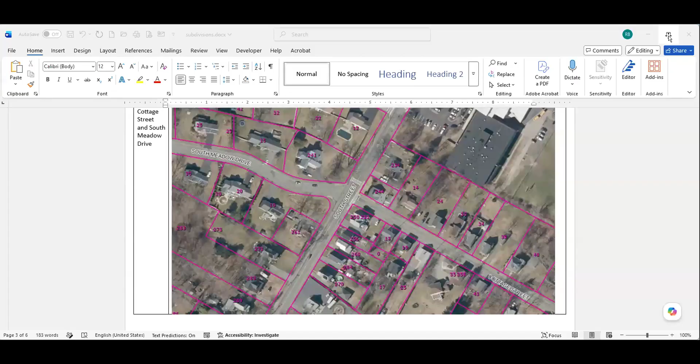Okay, so if you're at South Drive and you look across, there's your road. So my position is that this is an intersection, and the roadway is across from the current roadway that's there at South Drive. I don't see any issue with that alignment whatsoever. And I think that this is the best illustration that shows you what it really looks like. I can show you other examples in the town that you frequent, I'm sure, and you don't even give it a thought. One that comes to mind is where Birch Street meets Village Gate Drive. Yeah, so you see Birch Street, Village Gate Drive. That's more offset than this is, and people just travel across from one to the other.

What's the next one that we were looking at there? This one here was Cottage Street. You come up Cottage Street, South Meadow Drive was done, I don't know how many years ago, maybe 15, 20 years ago. But its alignment with Cottage Street is not 100%. It's pretty close, but it's similar to what we're talking about. And those two have obviously more traffic to handle there between South Drive and Cottage itself, never mind bringing in South Meadow.

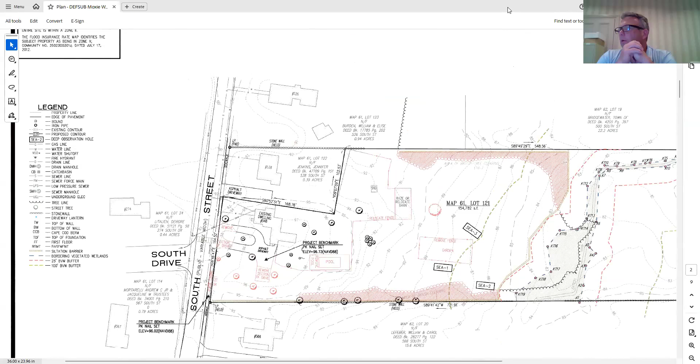Okay, thank you. Larry, I have a couple. Rebecca, can you bring up the most updated plan set? I just want to go through and get clarification on a couple of things. Of course. Is there a certain page you'd like to see? If you can start with page 1. Okay. You got it? No, the front page. The cover page first. Got it. Okay. Well, one of the pages you had the nitrogen loading calcs on. Where is that page? I thought it was page 1. It's actually page 3. Okay, can you blow that up?

So we've gotten a number of letters, most recently the one June 17th regarding the zone 2 and the water quality and everything else in that area, which I'm concerned about as well, right? So after getting those letters and just before the last meeting, I pulled up the Title V regs just to try to better understand it. From what I understand looking at the DEP regs, what they refer to was a nitrogen aggregation subdivision plan, right? So it says DEP recommends a nitrogen aggregation subdivision plan be submitted.

And I asked this question before about restrictions on each lot. So you're showing that there can be 12 bedrooms total on the lots, but one of the lots, lot 4, already has sewer. Is that correct? Yep. So the remaining 3 lots will have the 12 bedrooms, correct? Yes, and they will use some of the excess of the land that's there. Lot 4 can still contribute to it not being a nitrogen loading issue. So all 4 lots will have a nitrogen loading restriction on them, correct? Yes.

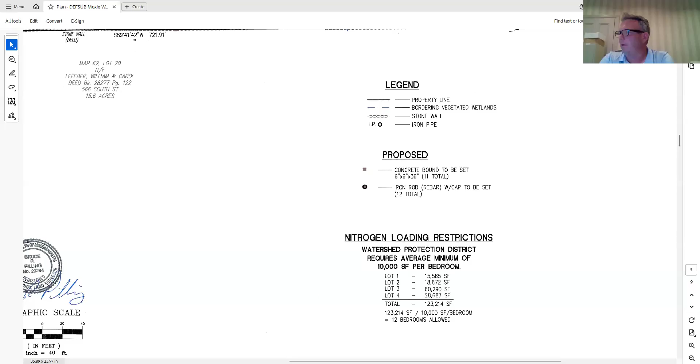I don't understand. The nitrogen loading issue is not related to your water withdrawal. It has to do with its proximity to the aquifer, the town's aquifer. So I don't understand what the well on the site has to do. Well, so all 4 of these lots, you're gonna do a nitrogen loading plan or an alternative design for all 4 of these lots, correct? Right. And you're pretty sure that lot 3 will not have to be modified to have the credit land housed on that lot?

That it would have to have what? So where would the credit land be? The community itself is going to aggregate together in that aggregation plan. Yeah. And some of the restrictions are simply don't fertilize, or the pavement doesn't count, which is why the road isn't counted into the calculation. But the whole aggregate, the whole sum of all 4 lots, will work in conjunction with each other.

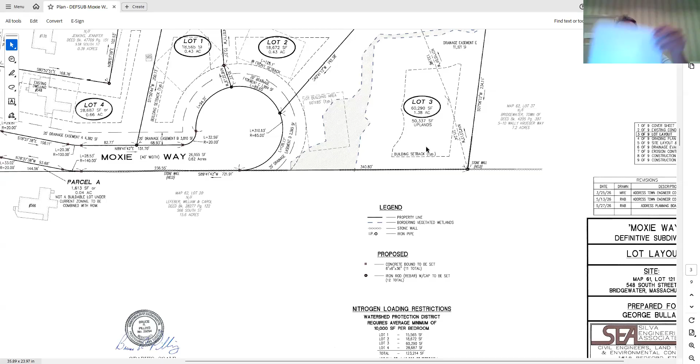So whatever restrictions. And just because I want to make sure that if we go forward with this tonight, we get the condition right. So there needs to be a nitrogen loading plan for the entire site, correct? Yes. And I guess the confusing part to me was I always thought, and I guess I'm wrong, that each lot had to have the 10,000 square feet, or you needed credit land somewhere else. And one of the examples they give talks about a developer wanting to build.

It says, an example: developer has 42 acres in a zone 2. The usual subdivision in this town could support 36 1-acre lots with 4-bedroom homes. However, there are 6 acres of roads. To meet the 440 gallon per day rule, the developer proposes to aggregate with the cluster subdivision allowed under local zoning and do half-acre lots. So basically, the applicant proposes 36 homes, each on a half-acre, on a total of 18 acres. To meet the 440 per acre equivalency, the applicant must set aside land area of 18 acres.

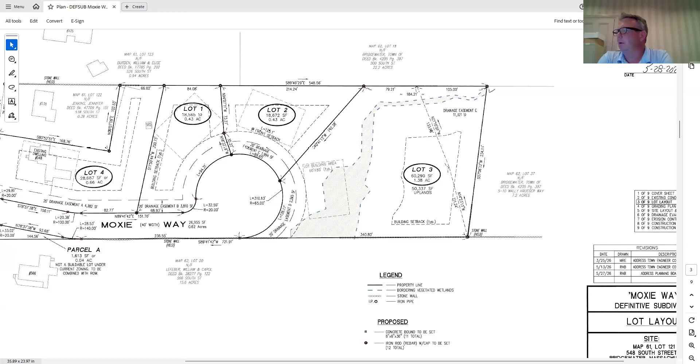So there's no land being set aside, is that correct? Well, what is being set aside, it's being restricted. When they say set aside, they mean that it's having a restriction on it. Yeah, a conservation nitrogen loading restriction, right? Yeah, and that's what we're doing. And that can just be part of lots 1, 2, and 3. Yeah, it's going to be part of 4 because 4 has excess land that can contribute. But Rebecca was saying we don't need the land from 4 to do it? No, we need all 4. I'm sorry, we do need all 4.

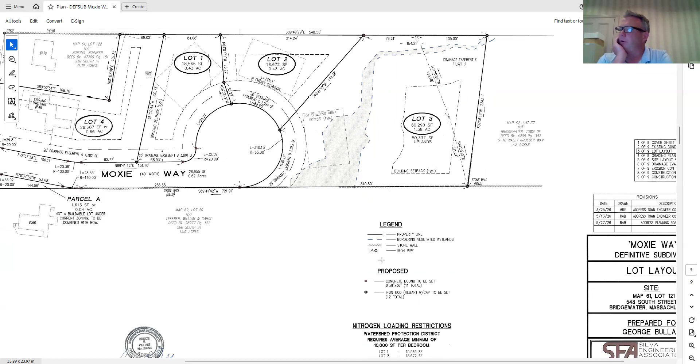So we need the land from 4, because 4 doesn't take away, because it's connected to sewer, but it has land that can place a restriction on it that helps the other 3 lots. Okay. So the total number of bedrooms on lots 1, 2, and 3 cannot exceed 12. Not unless further denitrification was proposed, which would cause more Board of Health approval process. And I learned something. In the future, when we have stuff coming in zone 2, whoever the planner is, we should be requesting that a nitrogen aggregation plan be submitted prior to coming to us.

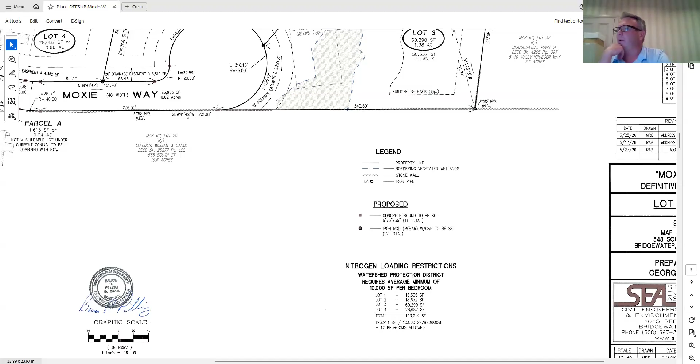But, all right. So next, while you're on the screen, can you go up a little bit, Rebecca? Because I have a drainage question. So Larry, you said, and Greg, do you agree with Larry's assessment that the drainage basin and drainage easement E is not part of the subdivision drainage calcs?

Greg? Greg, you're muted.

Sorry about that. So I reviewed the drainage calculations, and in order to meet the pre and post BMP standard 2 runoff condition, the basin on lot 3 needs to be built. Otherwise, the 2 and the 100-year storms aren't mitigated. The basin on lot 3 is part of the subdivision's hydraulic analysis. So I have to say that basin on lot 3 is needed in order to meet the pre and post development mitigation standards, which is BMP standard 2.

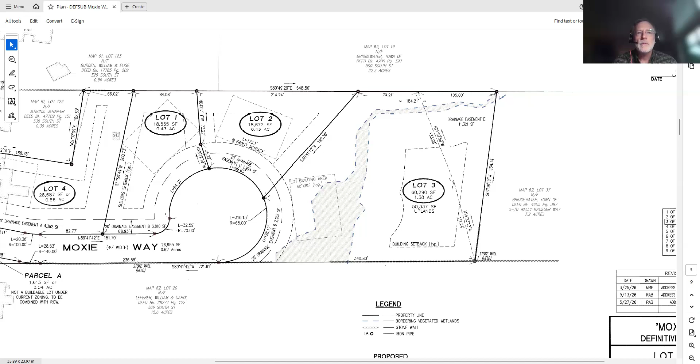Well, a cursory review based on this design and this house, and what I can remember from the drainage is what little bits aren't going into the drainage basin already, I don't think would trip the pre to post. But unfortunately, like Greg said, unless I run that scenario where we remove the driveway and tie everything up with the grades, I really don't have 100% on that. We might have a little bit of a swale that we could introduce on this lot to offset it. It wouldn't be a huge event that we would have to create another large basin.

It would be a small little depression we may have to do on one of the lots just to offset the little bit that we may encounter. Again, unless we're looking at that scenario directly, it's tough. I can only assume we would be just under those numbers or at those numbers. But just so I understand, it is part of the subdivision drainage and it would have to be maintained by the HOA, correct? I don't believe that was the case.

Well, the reason I ask is there's an easement that we asked for, Mr. Tanzi asked for. But I'm trying to better understand how the easement does anything because there's no access. The easement, we need access to, right? You need an easement over the driveway. I mean, how is that basin going to be maintained with no easement access? Homeowner of lot 3 would be required to maintain it?

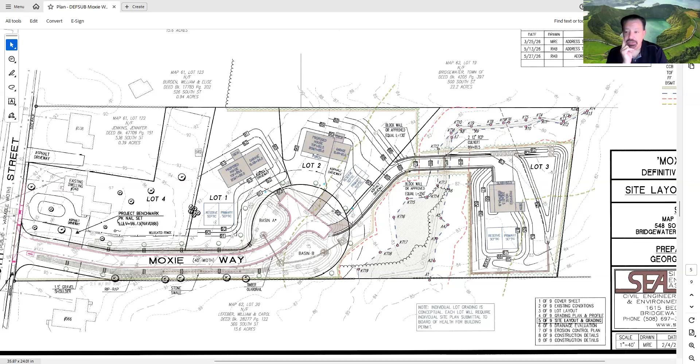But that's part of the drainage analysis, so that would have to come back for Greg's review or a modification, is that correct? Well, when lot 3 would be developed, yeah. And it also has to go through conservation, so they would have a chance to review it for those requirements as well. Okay. So can you go to the easement page where you have the drainage easements shown? So just looking at the updated plans. So I know the trees were in and the trees were out. Now the trees are back in.

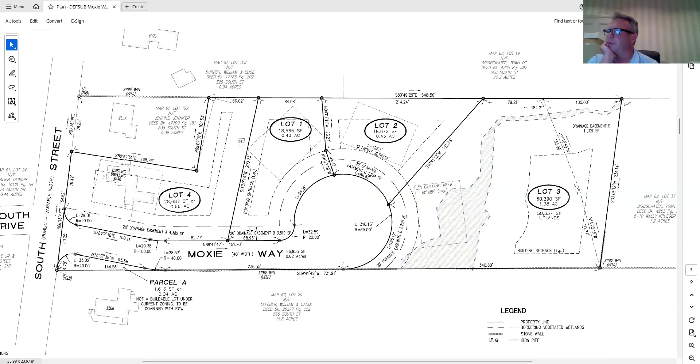You show a 20-foot drainage easement there, and then we've had issues where we've had lots conveyed out and things like that. You're showing trees in that drainage easement as well now, correct? Outside of the layout? Let me skip to the page that shows the trees. There are trees just outside that layout. So we'd have to change that to drainage and tree planting easement. Correct? Or am I wrong? Yeah, or move them out of the drainage easement, I suppose. That would be an option.

But Rebecca, we can hardly hear you. At least I can.

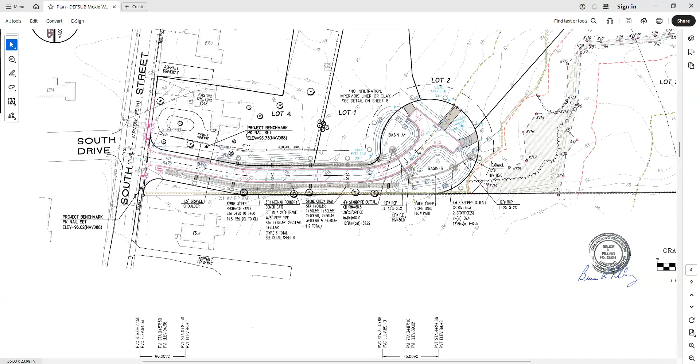Yes, we could move them, or we could relabel it. I mean, it's up to you if you move them or you add tree planting easement there as well. I think we would just change the title on it so that it includes both. I think pushing the trees back would not really achieve what you're looking to try to have those trees do.

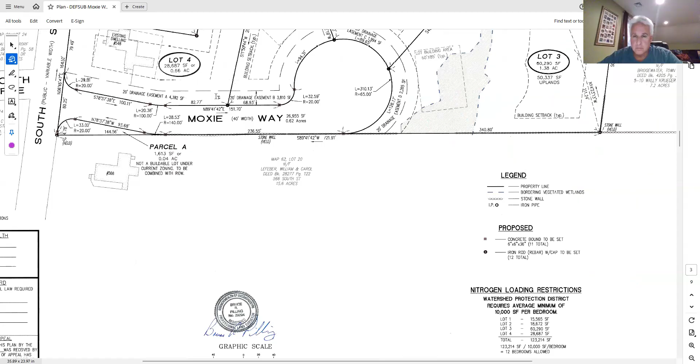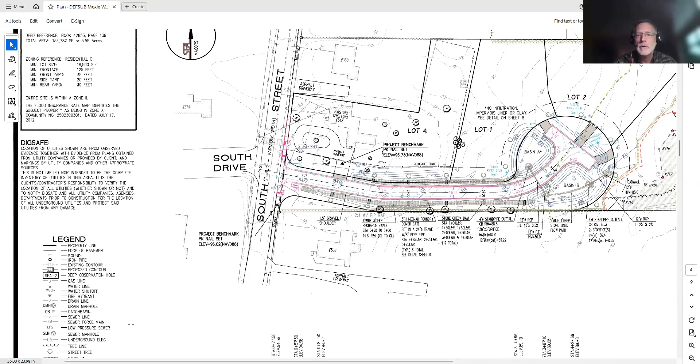So Greg, what Larry referred to as the alignment of streets. Do you agree with his assessment on that alignment, that it doesn't require a waiver? Well, I mean, he did show a lot of alignments throughout town that are very similar to this alignment. I'm not sure whether waivers were required for those alignments or not. I suppose the board may want to be consistent in that area, unless some of the subdivisions were in the 70s and the 80s though. So maybe I don't know what the rules and regs were back then.

So I mean, I haven't got a problem if you include it as a waiver, but I'm just saying from a practical point of view, I don't think you're waiving really anything because they really are across from one another. Yeah, I'll stop asking questions for the time being. And other board members, questions, concerns?

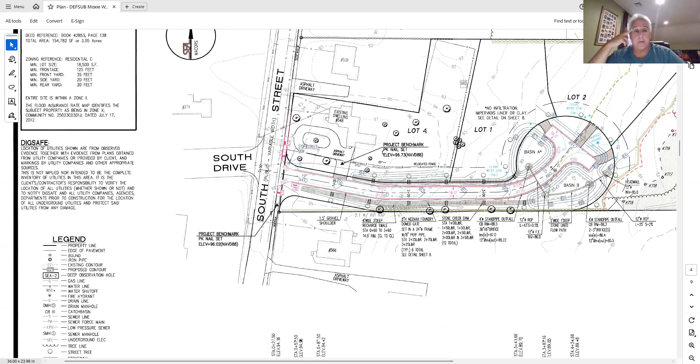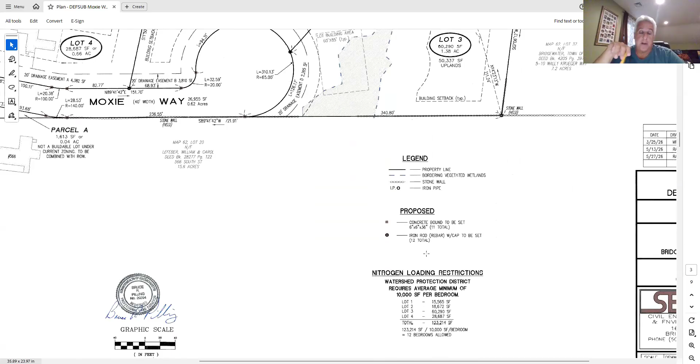I have one question. When this plan gets finalized, is lot 3 going to be listed as an unbuildable lot? Technically, it wouldn't be listed as an unbuildable lot, but it would require more permitting in order for it to be buildable. Right, but as far as for this process that we're doing here, it should be listed as unbuildable. What justification? Why would that be? Because of all the information on the drainage basin and the requirements that would be needed to build a lot. Right now, it's unbuildable. I'm afraid I don't follow.

Is there, I don't think they'd have to list it as unbuildable, Steve. I think they just have to meet all the requirements. Yeah. When they decide to build it. We have this note, is that kind of what you're thinking? That the individual lots would require their own site plan submittals? No. No, okay. Because it meets frontage and area, right?

Yeah, it has to jump through more hoops, Steve. I mean, because... Yeah, I know. You know what? As I've been the building inspector here 10 years, when things get past like 5, 7, 8 years, as we've seen with all the court cases we've had to deal with, that's why I just want to make sure that it's pretty well listed what the issues are.

Yeah, and I look back at some approvals we've had in a zone two that haven't been developed yet, but I'm glad this came up because they're gonna have to either have alternative systems or figure out a way to mitigate the nitrogen. I think this is really important now, especially with the quality of the wells we have in town. So one of the big concerns I have is that we get a nitrogen loading restriction on all these lots.

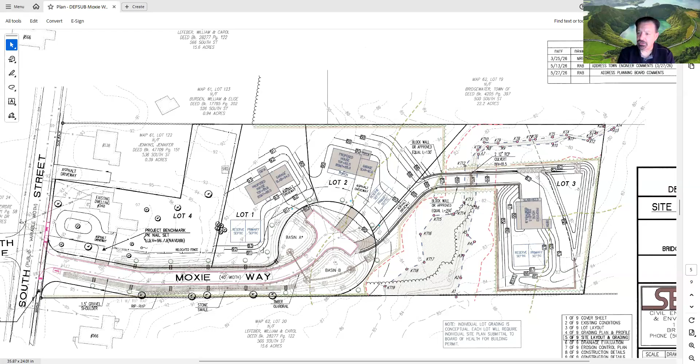And if I can add to that nitrogen issue, I'm looking at the aggregation policy guideline. What they limit on a nitrogen loading restriction is the use of man-made sources of nitrogen, such as wastewater discharges. So we have to limit the septic. Nitrogen-based fertilizers, those are out. The raising and grazing of livestock, probably not going to happen here. The introduction of artificially rendered impervious surfaces, which is why pavement is excluded from the calculations, and the creation of land underwater, which is why lakes and ponds are not used for credit land.

So what you're referring to are the restrictions on credit land. Those are the restrictions that the nitrogen loading restriction plan is going to require to be written in the deed. It's not saying you can't have a house. It's just saying you can't use a fertilizer, you can't have your cows poop on the lawn. Yeah, and I think you can use fertilizer, just not nitrogen-based fertilizers. Right, restricted. So the limitations aren't so far-fetched that they don't apply here.

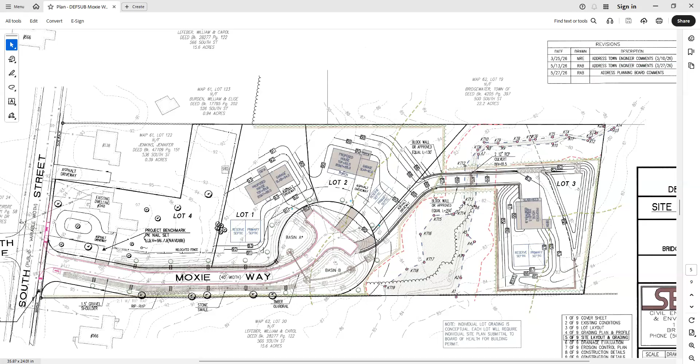Okay. Other board member comments? Yeah, so you guys did open up the mouth abutting South Street? Larry, did you? When you say opened it up... We had discussion about having it wider. We showed it at that hearing. It's not shown on this plan. Okay. So if you wanted to make a condition that the radius be increased on the record plan, it could be. I don't think it does a lot, Chris, but we're not against it.

I have to tell you, you were meeting the criteria of what is allowed now with the 40-foot road. I do think going forward it would be in the town's best interest to relook at whether these should be approved. But as of now, this does meet it. I think it would help getting in and out on South Street. Pat, can we possibly vote on lots 1 and 2 and just hold back on 3 until they adjust the calculations, or would it have to be all done together?

So you're asking if we can approve 2 lots and not 3? Correct. Until they bring back the drainage calcs and what they need for the third, because the rest of it meets what's allowed.

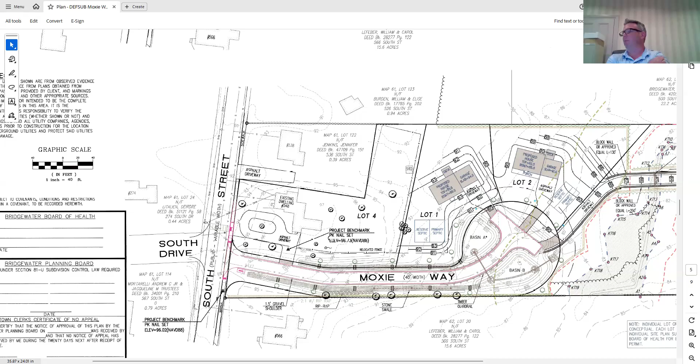Are there any other board questions or comments? Dan, Tom? No? I have none at this time. All right. So Jane, are you still with us? Jane? I'm here. All right, yep.

So we'll open it up for public comment now. And again, I will just note for the record that on June 17th, the newest piece of correspondence we received was an email from Mrs. Elise Burden that was sent to Mr. O'Brien on June 17th, and that was circulated to the board, so everybody does have that. But if there is anybody here from the public that wishes to speak, please just raise your hand, virtual hand or real hand, and we'll try to address you.

So Jane, it looks like we have a Mrs. Lefeber raising her hand. Is she? Okay. Can you unmute yourself, Mrs. Lefeber? Hang on, Carol. Okay. Yes. Welcome, good evening. Hi, Jane. Carol. Hi. You're everywhere. Just trying to help.

I have a few questions. You keep on going around on lot 3, but that has to pass conservation's approval before it even can be considered buildable, correct? So Larry, you don't have any conservation approvals yet, correct? I do not. So tonight it sounds as if the condition for approving the plan has to include lot 3. So are you putting the cart before the horse? Or am I misunderstanding what's being?

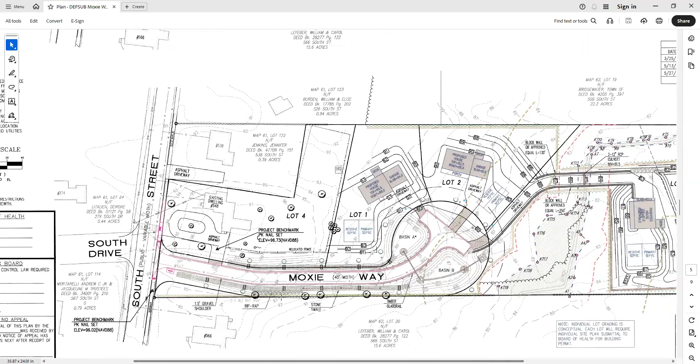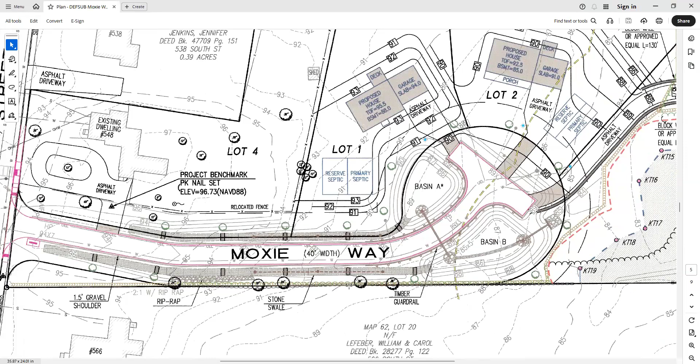Not ones that you're planning on adding. No, right here on the edge, these dark circles are the large trees. They don't show the canopy. It doesn't do it as much justice, but this is a 24, an 18, a 24, a 36, a 36. They're very large trees. Yes, they are. They're right along the edge. The plan for clearing was modified to really focus on clearing the brush and the underbrush and not the trees. The trees are to remain.

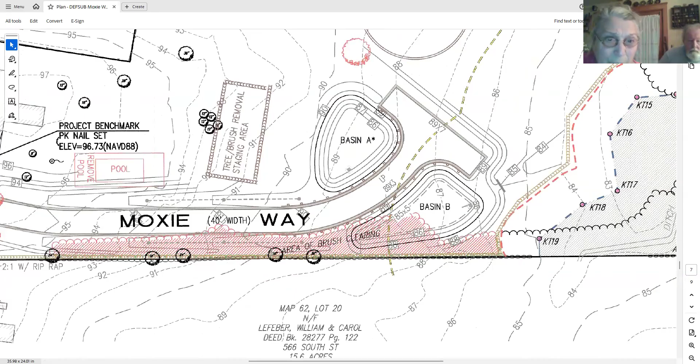All right, but the very large trees have very deep roots. You're proposing to put a roadway in that will excavate soil around those roots. What I'm concerned about, considering the proximity of those very large trees to our home, is maintaining their stability, as to whether they will become destabilized and potentially ruined or die because of an excavator digging around or at its roots. Is that a consideration?

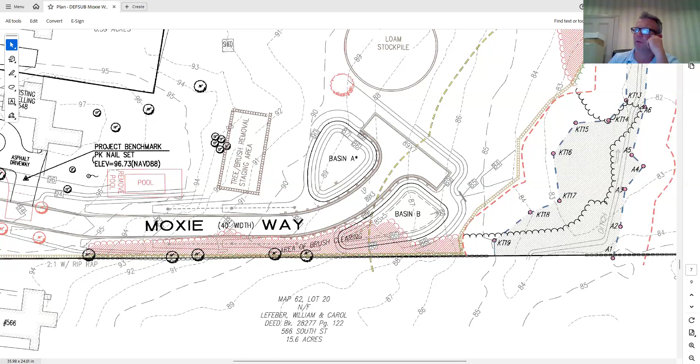Rebecca, how far away from the trunk of those trees will there be excavation? Do you have any idea, ballpark? I was trying to get that measurement. 1 second. Because the plan you showed with the placement of the road across from South Drive looked like it was right up against them. Because the road goes in between. Well, if you look at the screen, those red ones on the left side are being removed. Those are even larger, yeah. But it's the right side, right at the property line.

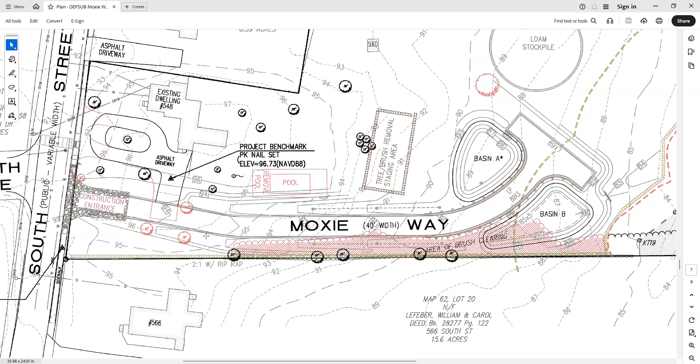So the roadway is 17 feet away, right here. So where the depth is going to be greatest at the road, not the grading for the swale, will be 17 feet away from those trees. All right, but then you have the swale. The swale is surface grading. It's just reshaping the top 18 inches or so. I'm sorry, could you repeat yourself? It's grading that will only interfere with the first 18 to 24 inches as we change the grades along the way. They don't touch the deep root systems.

And there's no chance? It just looks like they're right on the property line, some of them, the way you have this plan, the circles that I see. Those are existing, though. That's what I'm talking about, the existing ones that I'm concerned about. So if you look at the title Moxie Way, if you look at the circle that is under the O and the X and the E, those two, they're right on the property line, are they not?

They are close to the property line, and it's about 17, 18 feet to the actual Moxie Way roadway. And in between, there'd be a shallow swale, which is, as Rebecca just said, 18 to 24 inches is all that's going to be scraped in there in order to create the swale. Okay. They can't be on the property line because there's more space than that between our property line and the existing access way to the back of the current house down to its barn. I don't know where that would be. That would probably be lot 1 and lot 2.

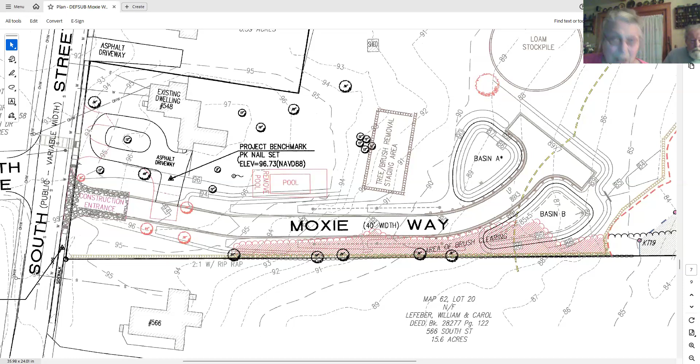So there's no plan in taking down these trees. I'm very concerned that I'm gonna have a maple tree into our house because of this construction. So that's one consideration I'd like you to take into this approval. And the other one is, you keep on talking about concerns on South Drive and South Street and this new Moxie Way. There's a school that's only 5 houses up north of Moxie Way. And the traffic going to that school and leaving that school on a daily basis during the school calendar year totally stops traffic for at least a half an hour, if not an hour. And it backs it up in both directions, both going south and going north.

Is there any consideration in putting in lights to assist the traffic flow? Because you have a lot of children on the sidewalks, you have a lot of parents lining up with kids in their car. Putting another road with more traffic, more need to access or egress that new road, is just going to make the situation even worse. Is there any consideration in putting in traffic lights? Because now you have South Drive, South Street, and you're going to add Moxie Way to the flow. Mr. Chairman, do you want me to address that? There are no plans for streetlights, no, at this point. And no consideration at all towards that possibility.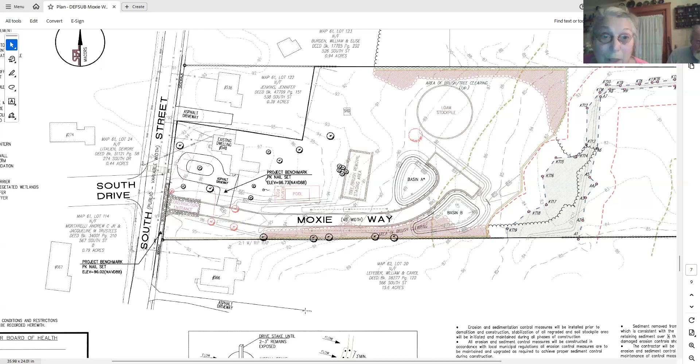It's just you seemed all concerned about South Drive and the width of the opening coming out of Moxie Way or entering Moxie Way, but there's going to be an impact on traffic. Even if there's only 3 houses there, there still will be. Just something else to think about. And I think one final question. What is the easement for? Which easement are you referencing? The one that you were talking about, I don't know what the easement is for. There's two easements that I asked about. One is around the roadway. Oh, this is about the water impact.

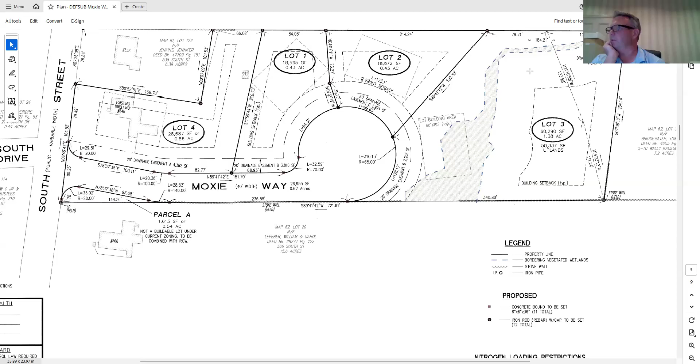Out in the rear of lot 3, there's a drainage easement E. But I think if there's a drainage easement E, it should connect some way out to the right of way, so that if it is needed for the subdivision calculations, it can be accessed and maintained by the HOA. So that was my question. Okay, you had for lot 3. Correct, and there's also an easement around the proposed cul-de-sac and right of way that was a drainage easement as well. But I asked that be added to be a drainage and tree easement. Okay, because we're naturally concerned about water runoff.

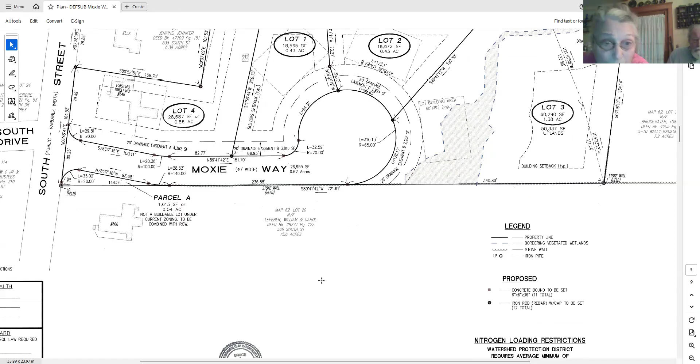And if you're adding impervious surface, which I believe is the asphalt drive, is the road not going to be asphalt? The road is asphalt. The 16 feet of the road is asphalt, yes. Okay, so there will be water runoff. Where is that water going? Well, they went through the drainage, and that's why the swales are on the side of the road, and that's why there's basin A and B, and that's why there's also a swale in the rear of lot 3, or a drainage basin in the rear of lot 3.

So the drainage basin will be the catch basin for this, for the road? Is that what you're telling me? There will be less runoff going directly towards your property because it's being intercepted and brought in a northeast direction. Okay, so the 100-year storm that you were referring to won't have a negative impact on that basin and the runoff?

I don't know, whoever wants to try and answer that. So we did have a drainage analysis done and reviewed by our town engineer, Mr. Tanzi. And he did confirm that, and Mr. Tanzi, you can step in, that it does meet the requirements. There's less runoff and less volume of runoff. We call it 90% pre and post. So there's less runoff after the development than prior to.

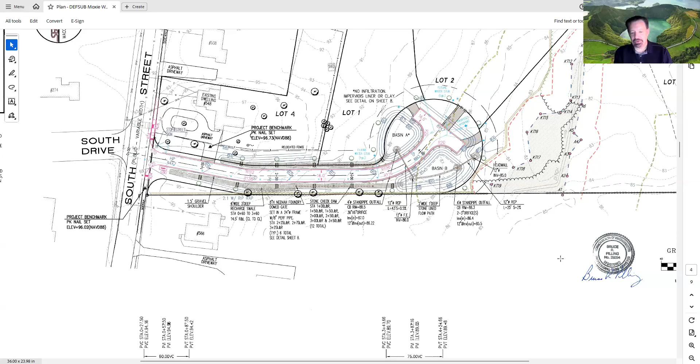Well, let me say this. Those 5 trees are on the project side. So there'll be no discussion if there was ever an issue with those trees as to whose responsibility it is to deal with them. Fair. All right, Mrs. Lefeber, any other questions at this point? Not at this point, thank you. Is there anybody else from the public that wishes to speak? All right, so we'll close public comment then. Mr. Brown? Any other board discussion or questions?

Yes, Mr. Chairman, I was muted, so I wasn't able to ask a question. So through you, are the waivers proposed still going to be asked for? Can you say that again? Are the 2 waivers that are proposed on this current subdivision still being asked for? Mr. Tanzi, Mr. Silva claims that the basin is not part of the subdivision and the alignment of streets is not relevant. Do you agree that those waivers should still be considered or not considered as waivers?

I believe that it probably would be prudent to consider the waiver for the alignment, just because it's not directly opposite. It's very close, but probably for future subdivisions and concerns about setting precedent, it might be prudent to entertain or require the waiver for the alignment. As far as the basin on lot 3 is concerned, it's required to meet the performance standards for the subdivision.

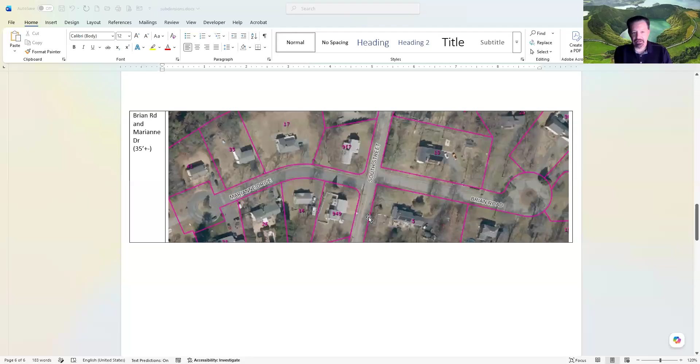That has not been a consideration on these 1 to 4s in the past. But my question is, how far is the drainage basin from the lot line? Well, how about we look at one that you've already approved with 1 to 4 lots and the detention basin is right on the property line? It's on the property line. Beaver Brook. And no waiver from drainage was requested because it was 4 or fewer lots. And strict compliance isn't encouraged per se on a 4 or fewer lot subdivision. And there are other ones that are in the cul-de-sac itself.

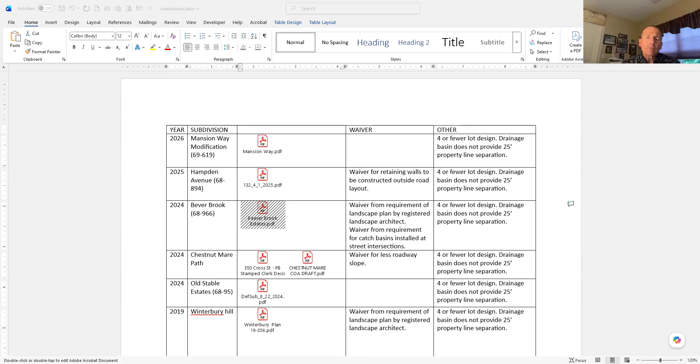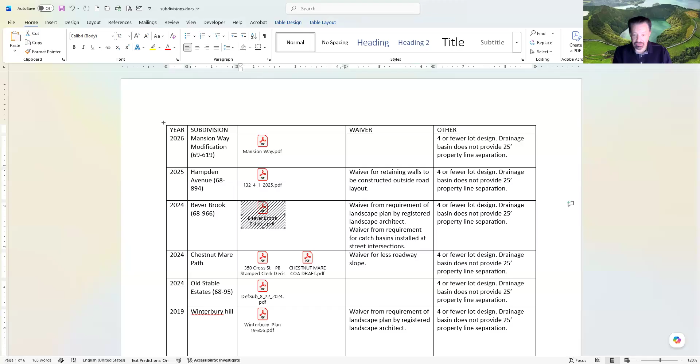How far is the drainage basin from the lot line? 6 feet. How many feet? The toe of the slope, 6 feet. How many feet? 6. And on Beaver Brook, it's on the line. The other ones in there didn't even ask for waivers. Some of them are in the cul-de-sac, so there's no separation. So we're not criticizing the other ones that are there. I'm just saying when you say in the cul-de-sac, but that's allowed, correct?

Yeah, but what we're saying is you're applying 2 different standards. You're trying to apply this drainage standard for full subdivisions to these 1 to 4 lots, and that's not what was being done as the standard for those 1 to 4 lot subdivisions in the past. I'm not saying we're for or against it, but I think we have to consider each site. There are environmental concerns here, however the regulations say in 1 to 4 lot subdivisions we may waive strict compliance.

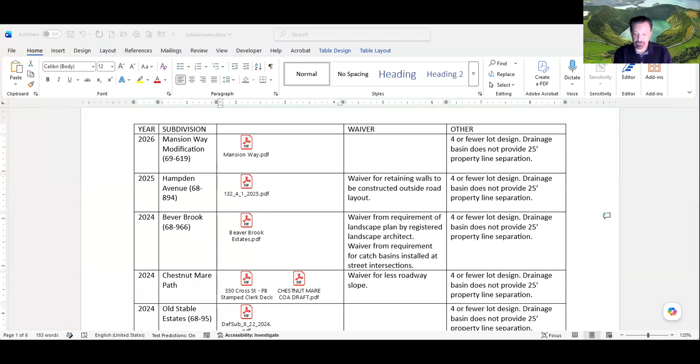Right, and what I'm saying is you have done that to a significant level in other subdivisions, and this here is in a lot development for lot 3, which may not even be a basin at that time. When the house gets built there, they may just put it all in chambers. Maybe we should have just showed it in chambers. We're giving you a scenario, we're not telling you what it's ultimately going to be on that lot, because it's more related to house development than it is for subdivision development.

That's all I'm saying. But just so I better understand it, any change in that would require an update to the stormwater calculations, correct? Correct. Well, I mean, when lot 3 is developed. Yeah, you can make that a condition. What I'm saying is whether or not lot 3 is developed, either way, if you don't follow the drainage basin as designed in the calcs, you would have to redo the calcs and come in for a modification, correct? Well, I don't know. It all depends on whether you feel conservation is handling what's happening with lot 3 and it's not really part of the subdivision.

But Greg, it is part of the subdivision drainage, correct? Yes. And lot 3 is part of the subdivision. It has frontage off the subdivision road. So any changes have to go for a modification. Any change in what's being shown for lot 3 would have to come back to the planning board as, could we use the term minor modification? I think we have to determine that in the hearing, so let's not talk about that now. Depends on what the modification is, so, all right. Any other board questions or comments?

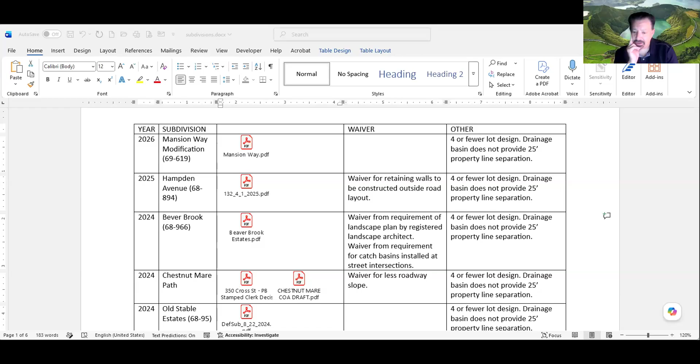So Larry, just to help me better understand Lot 3 and the waiver request. You mentioned all these other neighborhoods that have infrastructure within 25 feet of a property line. This particular structure also has an outfall, though, correct? This one has a what, please? Has an outfall? Yeah. How far is the outfall from the property line? Well, the ultimate outfall is the wetland system that goes through the property. No. The outfall on the drainage basin on Lot 3.

I'm more concerned about abutting properties, and that's why the waiver. I don't remember these other subdivisions having outfalls that close to a property line. How close is the outfall to the property line? 25 feet. So the outfall is 25 feet, which meets the regulation? Yes. Okay.

Any other board comments or questions? Mrs. LaFavor, are you trying to say something? Yes, I was. Well, we closed the public comment, but go ahead, go ahead.

I'm concerned about Lot 3. Still, the condition, you're saying if lots 1 and 2 are developed and then Lot 3 has a condition that needs to be met to build on, how are you going to go back to lot owners 1 and 2 and tell them they have to take care of the condition to build a house on lot 3? Because isn't that what you're saying?

That if lot 3 is not going to be built at the same time as 1 and 2, a condition has to be met as far as drainage. I think that's what you've been going back and forth on. And that needs to be met before lot 3 can be developed. And it's going to impact lots 1 and 2, or the owners of lots 1 and 2.

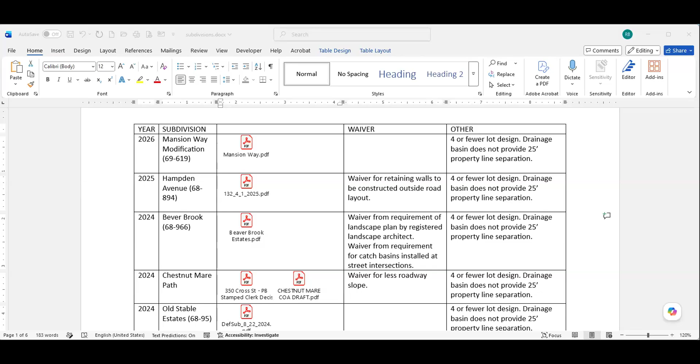That if we consider it, that's made crystal clear, you know what I mean? Because there are other subdivisions where we've held them to it that aren't built out yet. It needs to be very clear that this is a 1 to 4 lot subdivision allowance, and that's where we're at. That is correct. Yeah, I think that's well said. I think you want to set that precedent for sure. You don't want to conflate that with larger subdivisions for sure.

Okay. So Mr. O'Brien put together a decision letter. So first of all, we need a number of things before I can go forward. Lot 3 will be subject to Concom approval. The drainage easement. We're gonna need an HOA.

So one question I have though is, Mr. Tanzi, we asked the applicant to add a tree planting easement to the drainage easement, but do you also think there should be some sort of an easement connecting the basin on lot 3 to the street so that can be maintained? If that is part of the subdivision, the HOA needs to maintain that or make sure the owner's maintaining it. If they don't, they need to be able to access that. Do you think that makes sense?

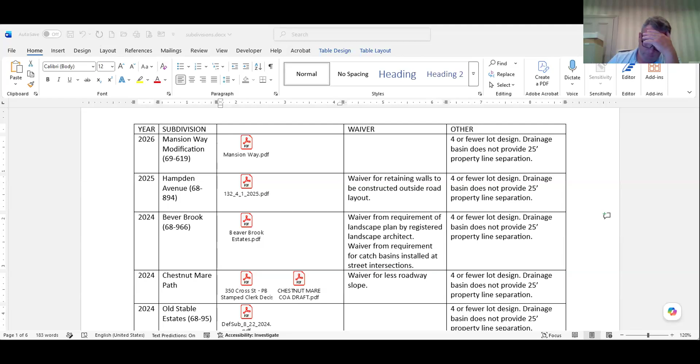Absolutely. So we have to ask for the easement to extend to the cul-de-sac? Yes. It could go down the driveway, which is probably the practical way to access it. Okay. And we need an HOA prior to any lot release on all 4 lots.

My question is, is it fair to put that burden on the owner of that lot to maintain that basin? Well, we'd have the HOA maintain it. If it's part of the subdivision and part of the calcs, we'd have the HOA maintain it, right? Yeah, I agree. I feel like it's been floated a little bit that that's another potential. So Dan, do you think that should be the owner's responsibility or the HOA's? I think it should be the HOA's. I don't think that should fall on one particular lot. Okay. Although they abut it and it's in their lot. All right. They'll have to have the HOA established prior to any lot release with responsibilities.

The road will have to remain private in perpetuity. A site plan for each lot, prepared and signed by a Mass registered engineer, will have to come for each lot prior to a building permit. Typical decisions. So Shane put item 33 in the draft decision letter.

He said the applicant shall meet the Title V requirements and provide information of nitrogen loading as part of each individual deed. So I would like to see the nitrogen loading plan for the 4 lots, the nitrogen aggregation plan. I think that needs to be submitted to the Board of Health and the DEP or whoever it goes to and approved prior to any lot release. And that we get a copy of it prior to lot release, so we know that that's been addressed.

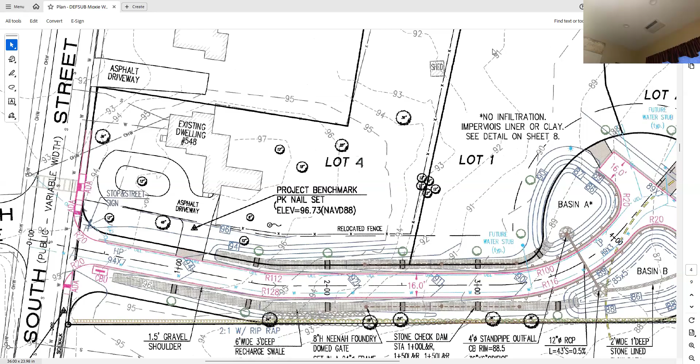Okay, anything else that we can think of? No? Nope. No. I'm good. All right. I know we don't have Shane here now, so what I can do is, Steve, do you have what he did here in Word? Do we have access to what he did? I'm waiting for the IT department to give me his drive, so I don't have his. Because if we could just amend, he has all the standard conditions about meeting Concom and all the boards and committees. That would be a lot easier to clean this up.

So just back to the nitrogen loading. Should we be asking Greg for the nitrogen loading aggregation plan as well? Or should I just put they need to meet the requirements of nitrogen loading and provide the deed restrictions and plans? I think we should have a nitrogen aggregation loading plan. Okay. I did talk to Mr. Antonero about it today, and he said that it does have to be done right, and each lot does have to be deed restricted because for the Board of Health of the town to keep track of it after that it's just too difficult. So he felt we needed a strong condition on that.